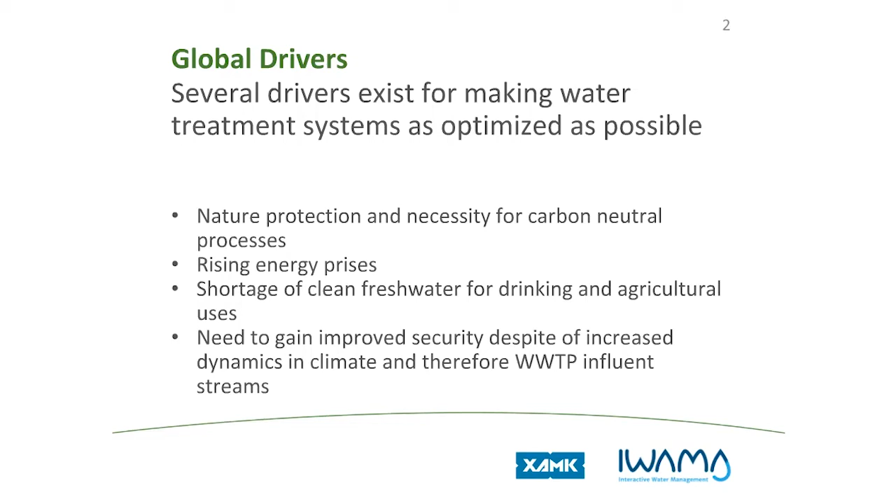So then the trends in actual water systems requirements - the rising energy price, which I didn't mention on the previous slide, causes us to have gotten, and will have in the future, more and more biogas units to produce energy out of the sludge produced in these processes.

Using the energy out of the sludge is one way of making wastewater treatment more carbon neutral, so it leads into that direction. But generally, energy optimization of processes is important, and that was seen in Lahti Aqua as well, as one area where development is being done.

Also tied up with that is smart data usage. You can try to, because the data you collect through more and more sensors, process that into information that can be used in adjusting the process, so that, for example, the energy usage is then minimized, or the quality of the sludge is such that it can be optimally used.

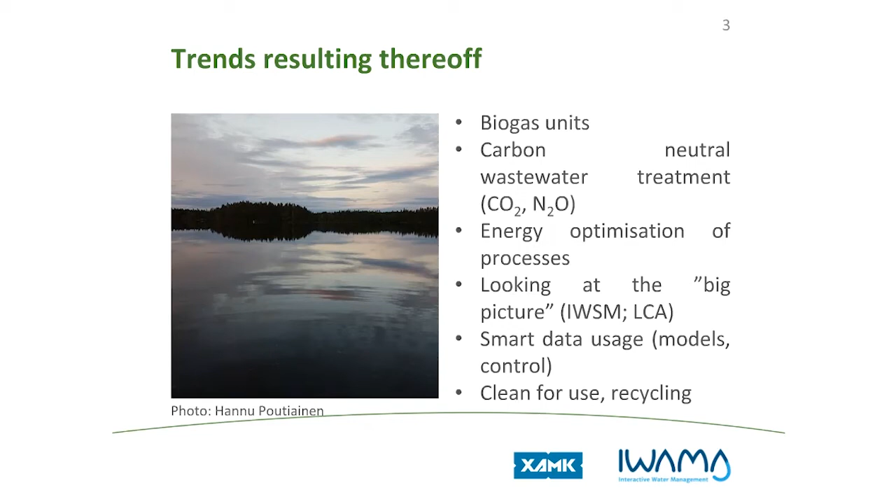You can have thermophilic or mesophilic reactions, or both in the same process. You can have several stages, one for hydrolyzation and one for the actual methanogenesis. You can have improved automation and control. You can add possible extra organic material into the process.

Here I can refer you to an article by Mr. Luste, where he was a co-author. If you search Bioresource Technology, Volume 100, Issue 1, you will find an article on increasing biogas production through co-digestion.

Then, for example, here in Mikkeli, as we are building a new wastewater treatment plant, we will have a separate organization that will handle the sludge and produce the biogas. I think this is a trend also, so that it's not 100% handled by the wastewater treatment plant company.

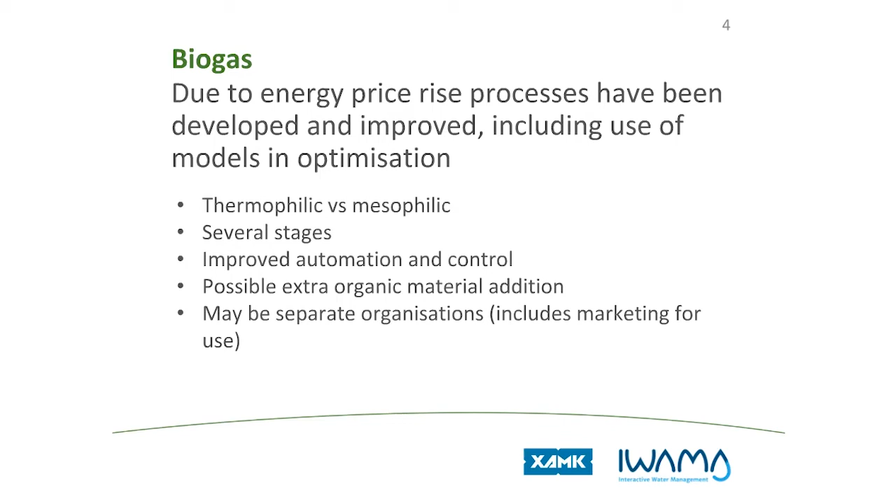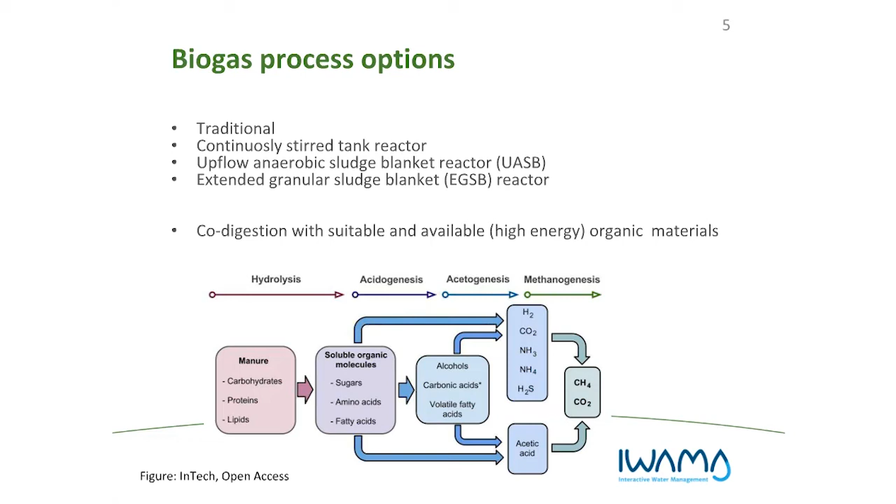Then a good thing to note, and something I was actually waiting for already before 2008, is that you can have a biogas unit in the process model as well.

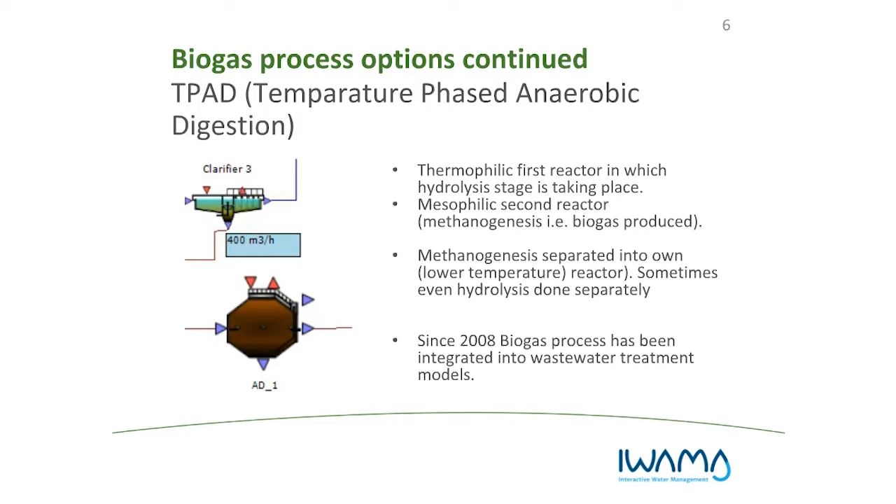That's a good development. Then this trend about carbon neutral wastewater treatment.

It was already known before that you can produce so-called laughing gas, nitrous oxide, if you have suboptimal conditions. That is still the case, but now some sensors exist for that. So it's possible to take this information and, for example, lower the amount of aeration up to a point where you see the increase in nitrous oxide production in the denitrification, and find an optimal point there.

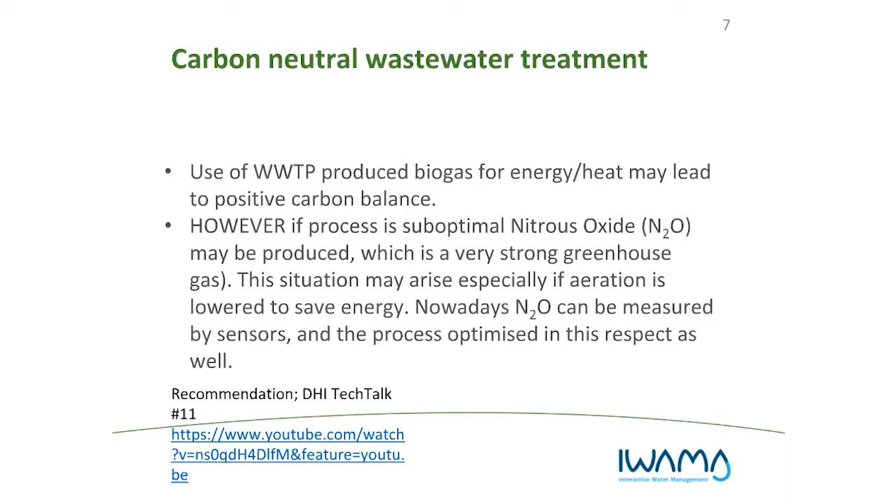Energy optimization can also be aided by using the models, because they now have this energy usage information on specific sub-processes. So it's possible to include this information in any optimization you do using the models.

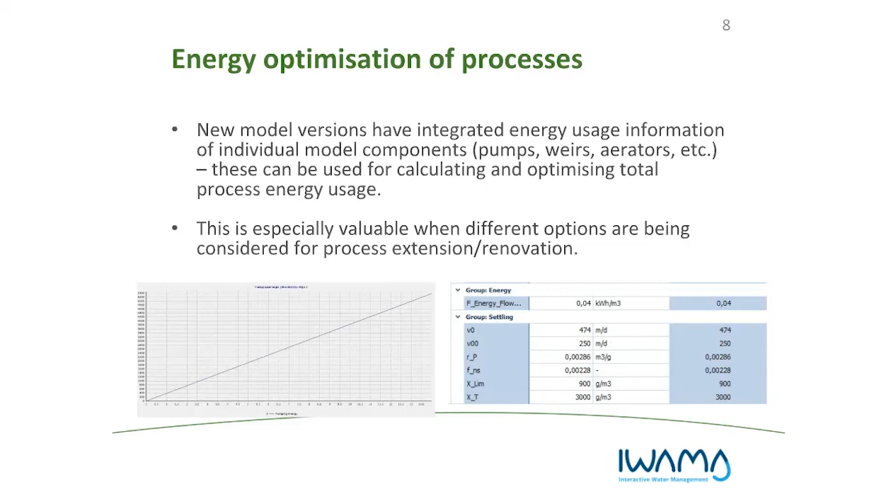Then one property is that you can set limits for effluents, also parameters inside the process, and make this type of graphical representation of those. You can have this type of model version used at the actual wastewater treatment plant, and normally this is supported by some consultant that has been doing the actual model.

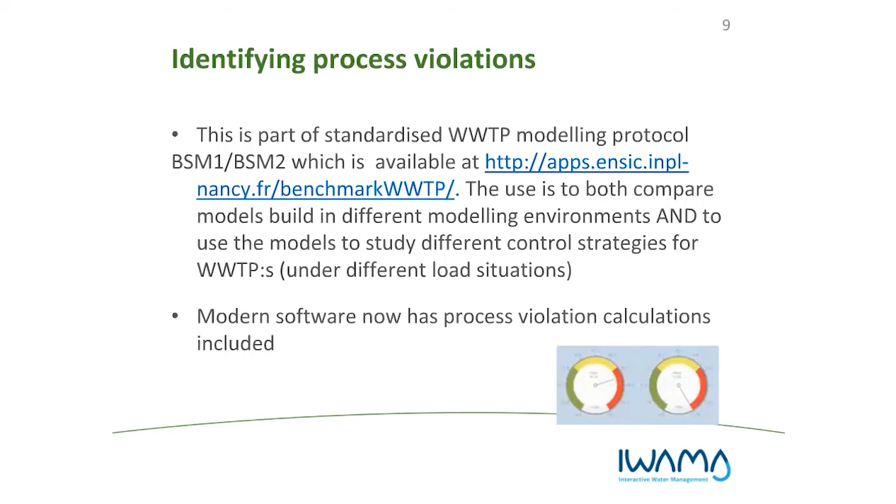And here's just an example of this type of system. There you have here, this is 100%, because the actual total Kjeldahl nitrogen, which is around 50 milligrams per liter in the influent, was calculated.

So the limit is about 12 milligrams per liter, which is 70%, a 70% reduction. So here this is from our old wastewater treatment plant, so there we don't reach this 70% reduction, but in the new one that is a requirement, so that will be reached.

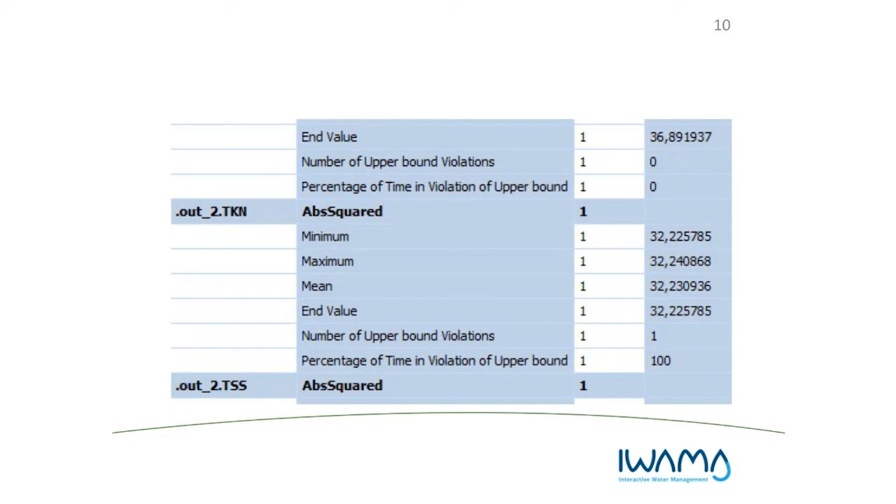Then this is just an example of a model building process, and I think this is important in the way that we are nowadays trying to build quality systems into building these models, which has been done by the IWA task group on good modeling practice.

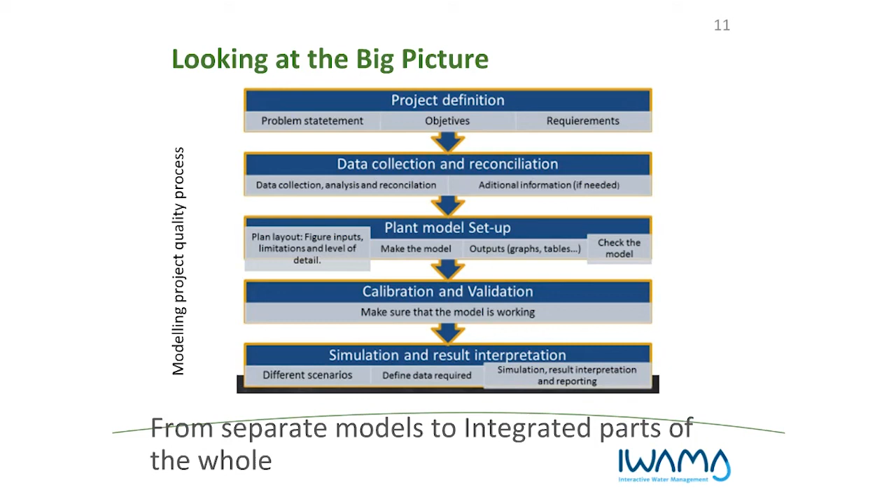Separate piece of information there. So then I think I will just move over this integrated urban water systems management approach. You can read it here from the slides. So this just means that you have like...

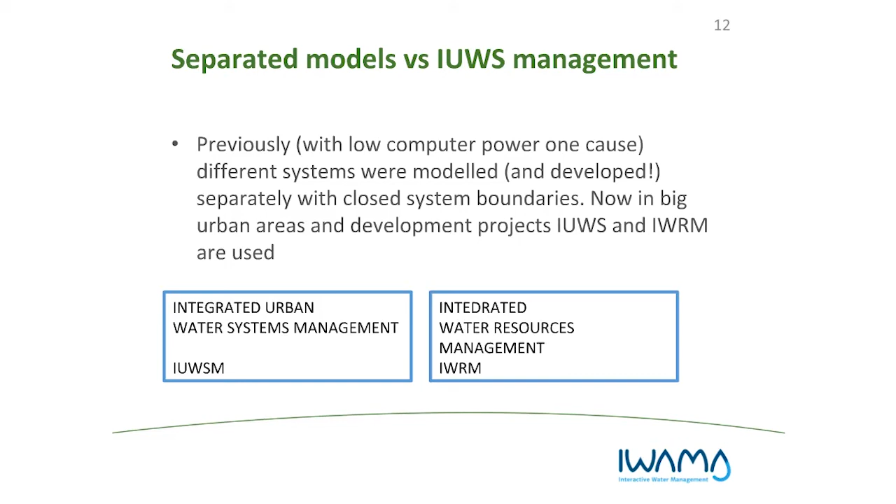not just the wastewater treatment plant, but you have a catchment area included, and then the rivers included. So you are talking about modeling a larger system at the same time.

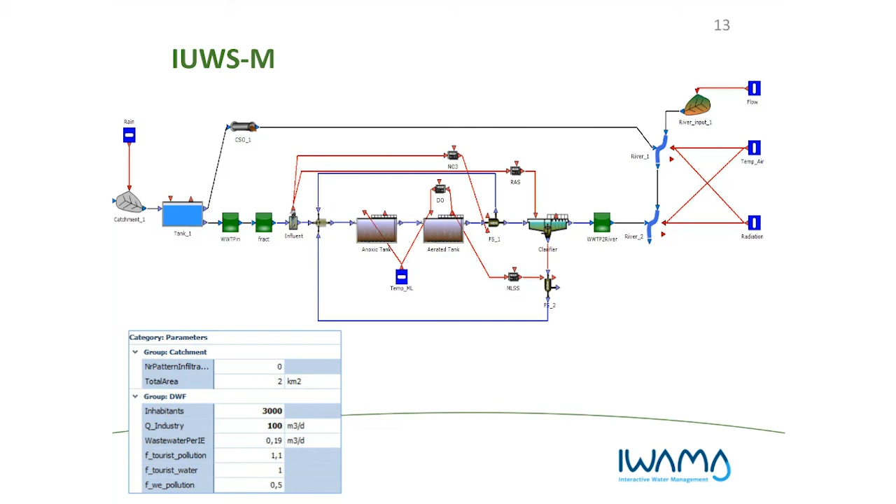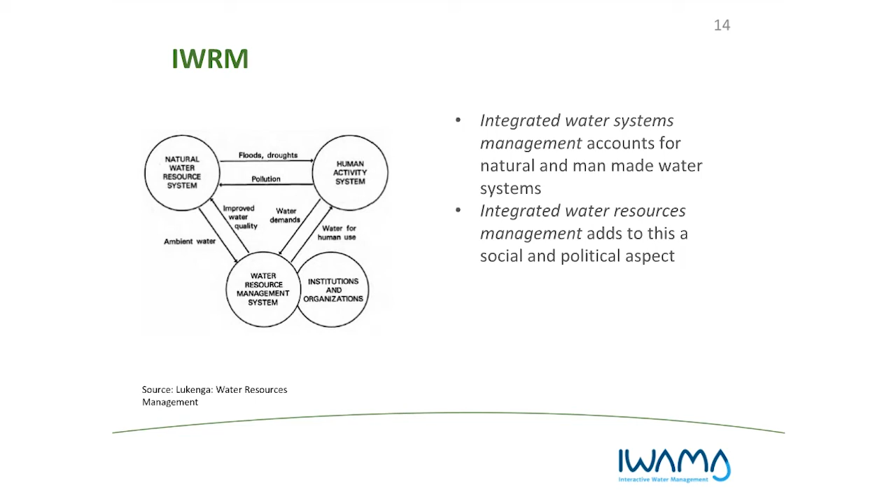And this is something you can nowadays do. Previously, it was not possible to consider this social and political aspect if you go to developing countries. So that is also something that in certain projects is important, but not, of course, if you are just trying to make the water treatment system as good as possible.

LCA is one trend that has come up lately. So this is what I commented on in Mika's presentation, that you can also not just calculate the cost over the life cycle, but then take into account the effects on effluent quality and the nature also. So there is some methodology there.

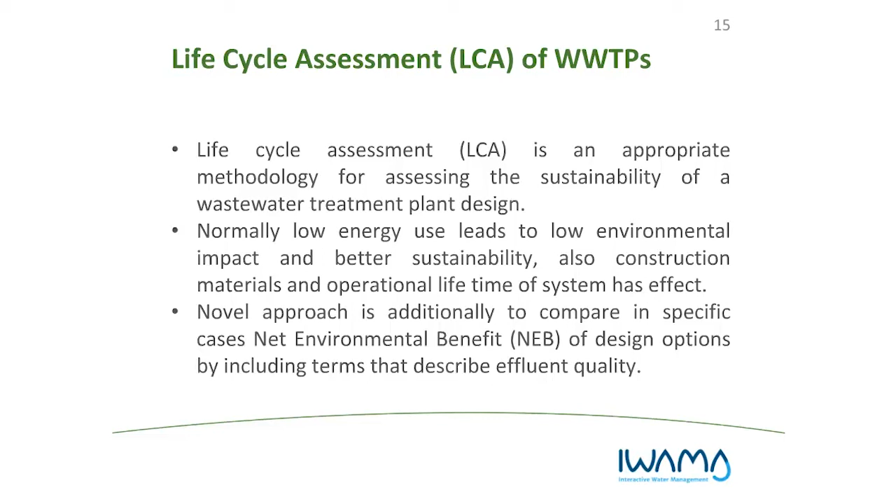So then to the actual control methods, there are quite few actually, if you think about how dynamic a wastewater treatment plant is. The main things are air feed and the internal recycle, and this sludge wastage percentage. The aim is normally to use minimum aeration to reach nitrogen reduction targets.

And the energy usage of the pumps increases more than the actual amount of dissolved oxygen or transfer of oxygen to the sludge. So therefore it's also important not to use too much aeration.

Ammonium measurement is something that you can use for adjusting the aeration.

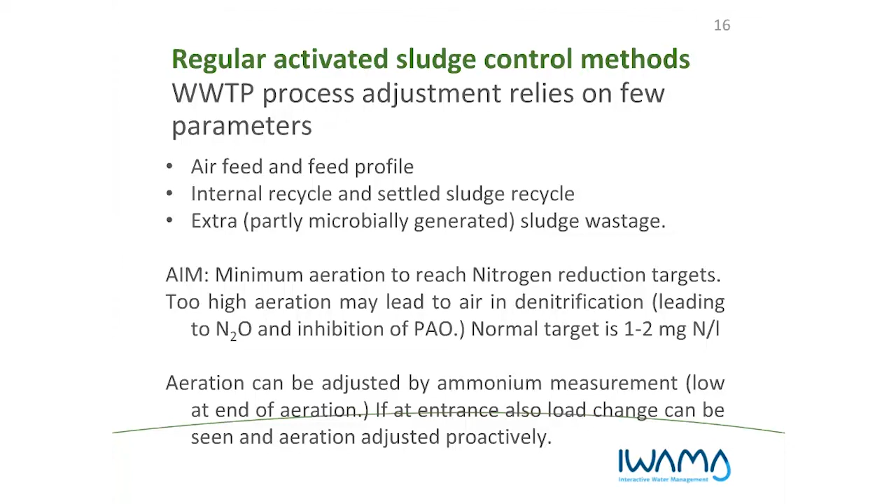So here's some basic data on the adjustment principles in a regular activated sludge. The amount of circulation has an effect on the amount of nitrate in denitrification, so you should be able to transfer enough nitrate to denitrification. But if the circulation is too much, then you can bring oxygen there, which is not positive.

And then it's mentioned that nitrate should be available in the whole anoxic area through sufficient circulation.

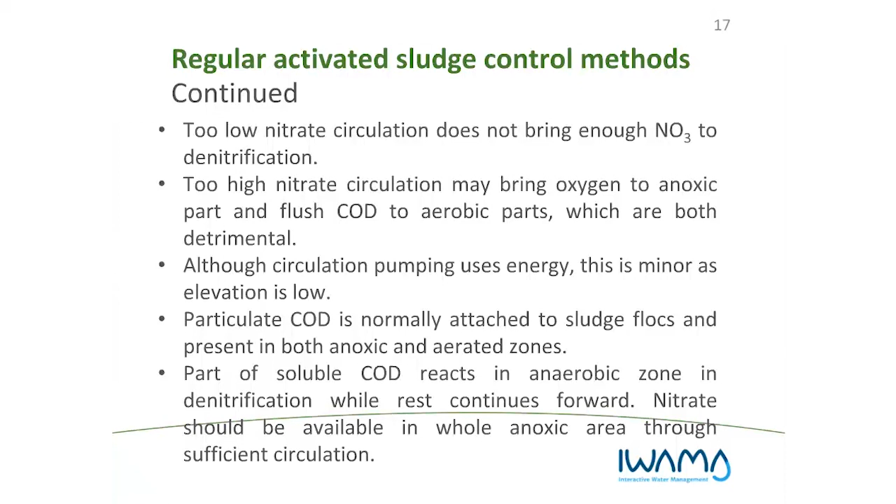Then there's this addition of external carbon source. So if you have a municipal waste that has high nitrogen concentration or very low COD level, then this might be beneficial. But of course it will increase these three things that are mentioned here: more sludge will be produced, more aeration energy will be used.

To adjust the additional carbon source addition, you can do that by having a nitrate sensor at the influent and then at the end of the aerobic sector.

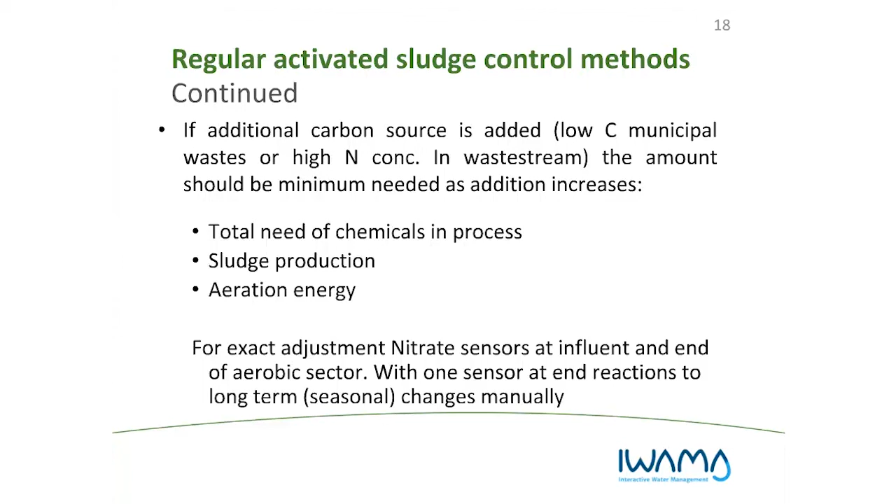And then this is normally not automated, but you just adjust it manually by changing the growth rate of the nitrification bacteria, which is then higher when you have higher seasonal temperatures.

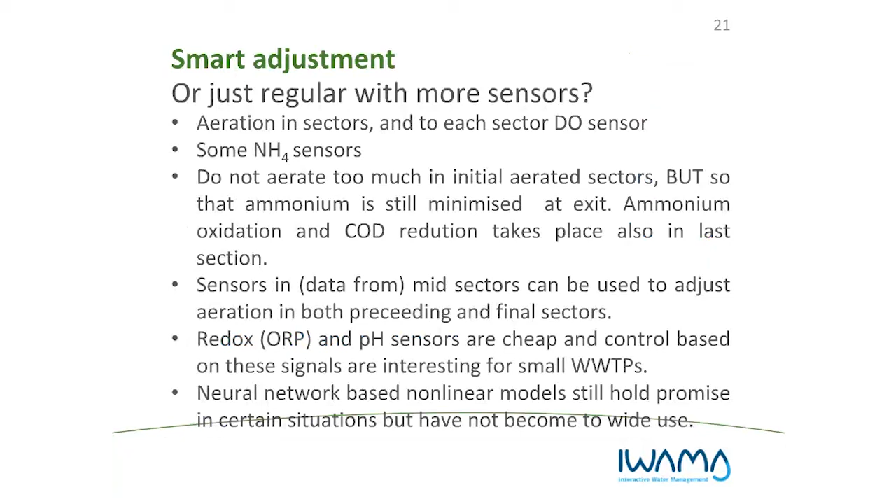Well, my understanding is that the prices for just general sensors have fallen quite dramatically. When I was doing my PhD, the prices were around 15,000 euros for some online ammonium or nitrate sensors. So I think that must have fallen considerably. So I think just get the sensors, as mentioned here in the presentation, and then use those for adjusting the process.

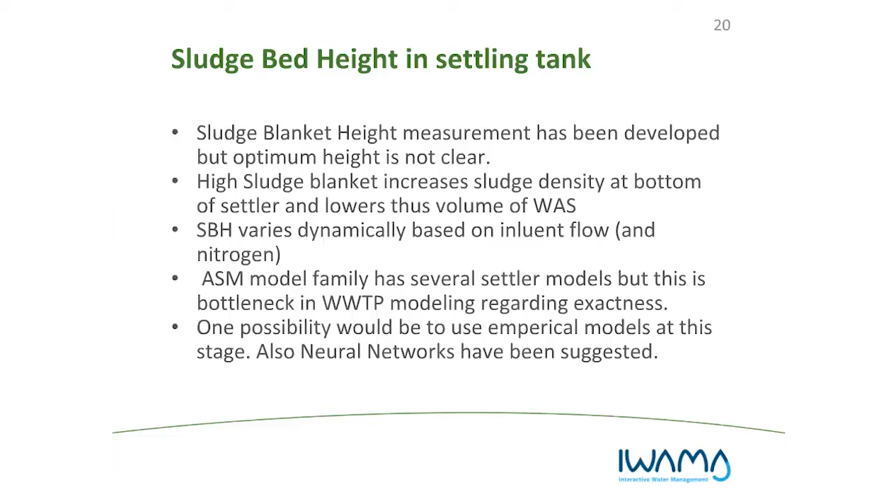I don't recall the actual adjustment processes now, but that can be found in the literature quite easily.

Somebody's asking where can we find the full version of the presentation. I think it should be available.